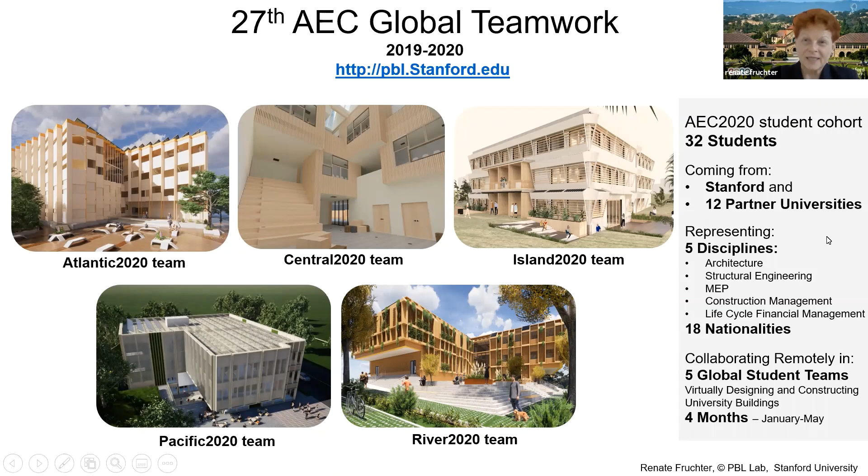But before we dive into very exciting student presentations, I want to extend a big thank you to our industry and faculty mentors, alumni, and owners and sponsors who so generously dedicated their time, attention, and knowledge to our AEC Global students.

In collaboration with industry partners, we defined 3 challenges to further foster the students' creativity, focused on sustainability, specifically this year, resilience, integrated project delivery, focused on the question whether to industrialize or not to industrialize, as well as shared risk and reward, and technology innovation, focused on intelligent interoperability between models and disciplines.

Winners will be announced at the end of the cyber event, May 8th. So don't forget to visit the PBL Lab Project Gallery website to find out who this year's winners are.

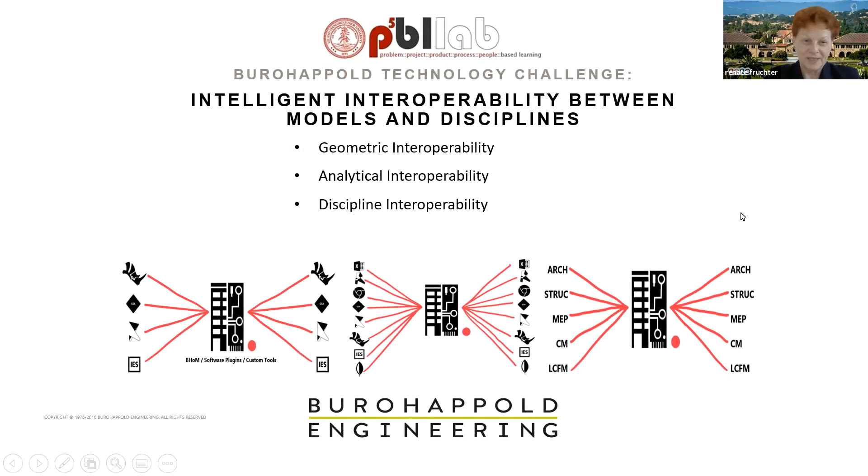Last but not least, a special thanks for the generous support of our technology industry partners that enable us to continue to develop new ways of working and learning by leveraging the latest emerging technologies like VR, virtual reality, AI, artificial intelligence, parametric modeling and optimization, and embed them in the students' new daily work practices that they experience in this global teamwork class.

And with that, let's move on to the student presentation.

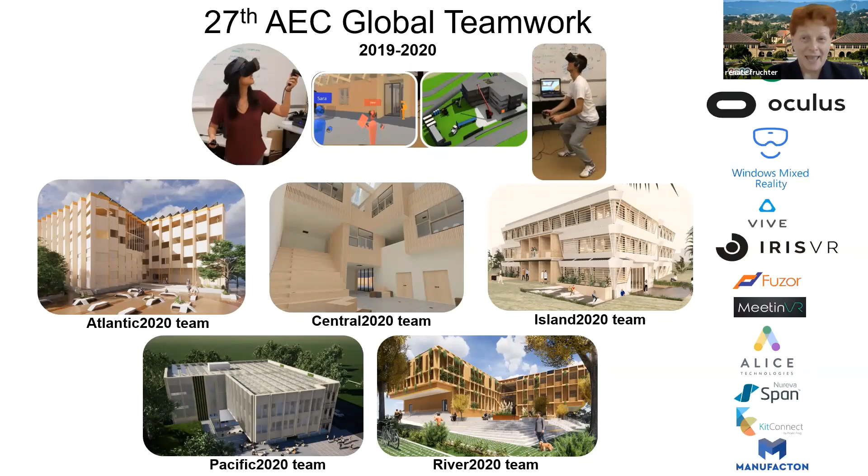The team consists of Maria, myself, MEP engineer from Copenhagen, Brandon, our structural engineer from Stanford, Ibrahim, the construction manager from Madison, Xuan, our second construction manager from Beijing, Isabella, our architect, and Lewis, the other structural engineer, both from Brisbane.

Our goals stem from who we are as a team, what we want to achieve in the project, and what we believe that we can achieve for the community through architecture, engineering, and construction. These can be categorized into three overarching categories: sustainability, collaboration, and technology, and relate directly to the outcomes that we can achieve in the project.

We believe in resilience, fostered through community inclusion, compliance with LEED standards, adaptability, and smart design. And we aim for a design and construction outcome that is prefabricated and disassemblable.

Our project is located at the fringe of the campus of the University of Wisconsin in Madison, located in the Midwest of the United States. While presenting opportunities for its views, our site is constrained by its lakefront location, single-site entry, and limited access.

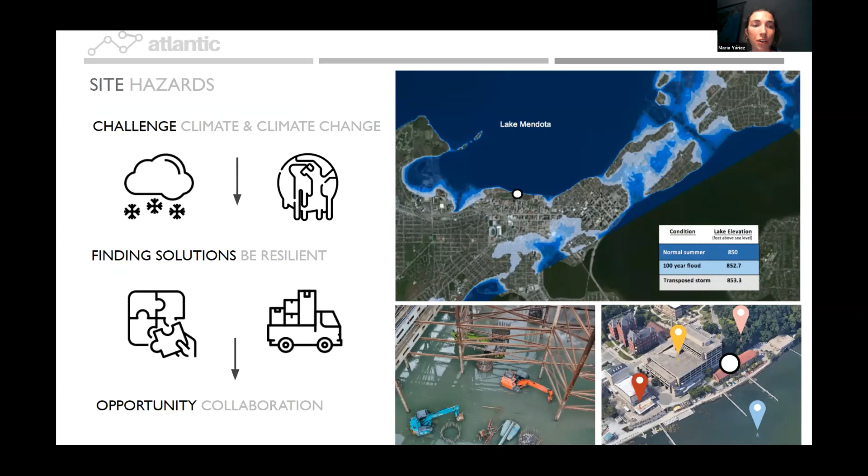Our team's process and conceptual driver is weaving, which implies the process of combining and integrating. We drew on the local historical practice of weaving, which extends from the basket weaving practice of traditional owners to textile production as part of the arts and crafts movement. Weaving unifies the threads of sustainability, technology, prefabrication, and discipline knowledge in a building for the future.

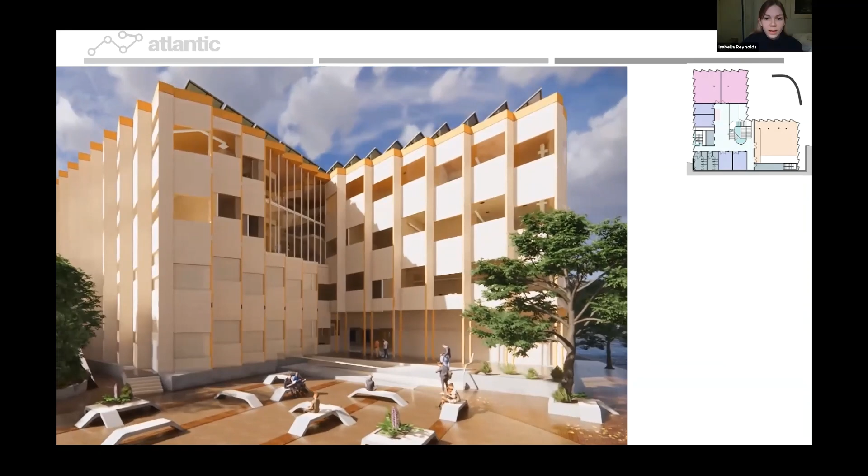The building product synthesizes the challenges of the previous iterations into an offering that interacts with its spectacular geography and evokes weaving through pattern, texture, and the interplay of light and shadow. It creates a place for learning, teaching, and making for a new generation of engineering professionals.

At the ground and mezzanine levels, learning spaces are centered around the connective stair, which connects levels physically and visually. At the first floor, faculty offices are gathered around a central open workspace, which allows staff and their students to meet and collaborate informally. The planning fosters connections between the building users through functional, delightful spaces, and the weaving concept

extends into the planning, with work pods weaving learning spaces into the public areas. Within the building, pattern created through opacity and transparency at the facade creates a dynamic, warm learning space throughout.

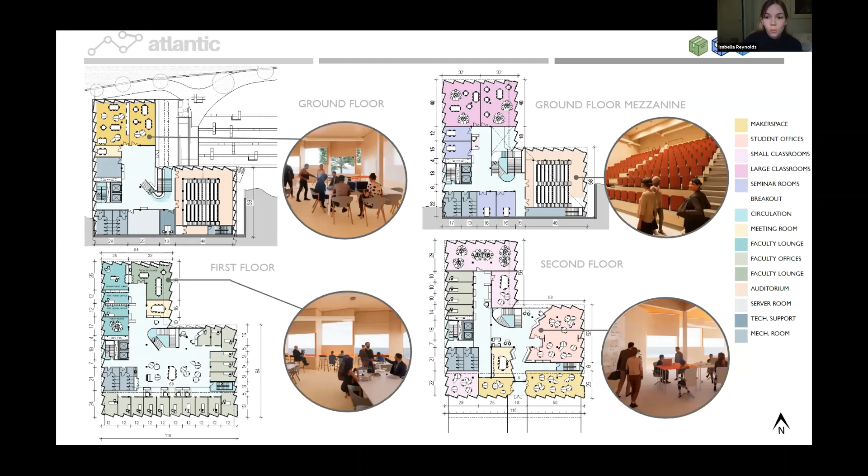All disciplines have worked together to integrate a design. A primary challenge was to create a design responsive to daylight and energy efficiency. Through collaboration with Isabella, our architect, the areas have been grouped together with similar positioning and thermal conditions.

The ventilation is decoupled from the heating and cooling systems, and this allows downsizing the equipment, reducing costs, and energy and space needs. The indoor air quality is achieved through fresh air, while thermal comfort is provided by hydronic floors and radiators placed in specific spots according to the thermal demand.

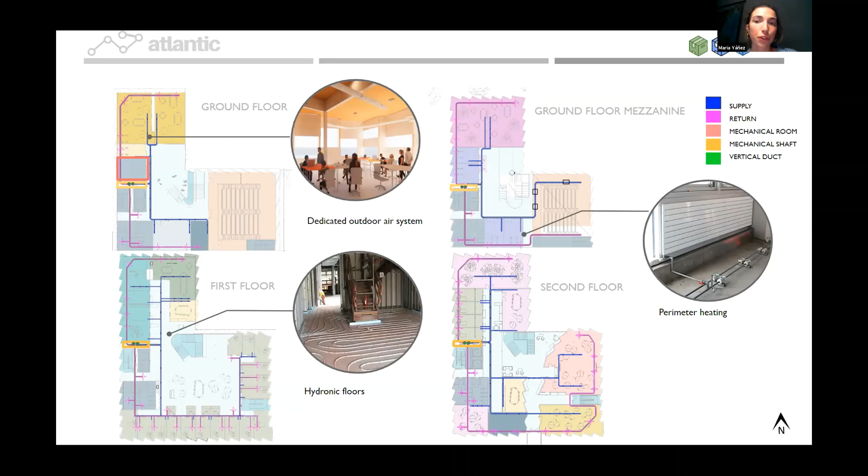Our grid system is actually concentric to the facade, providing uniform support to the CLT floor slabs along the building's perimeter. The beams in our grid were designed to not frame into the facade due to structural and constructability difficulties. Furthermore, disassembly of the facade would compromise the integrity of the building if beams were framing into it.

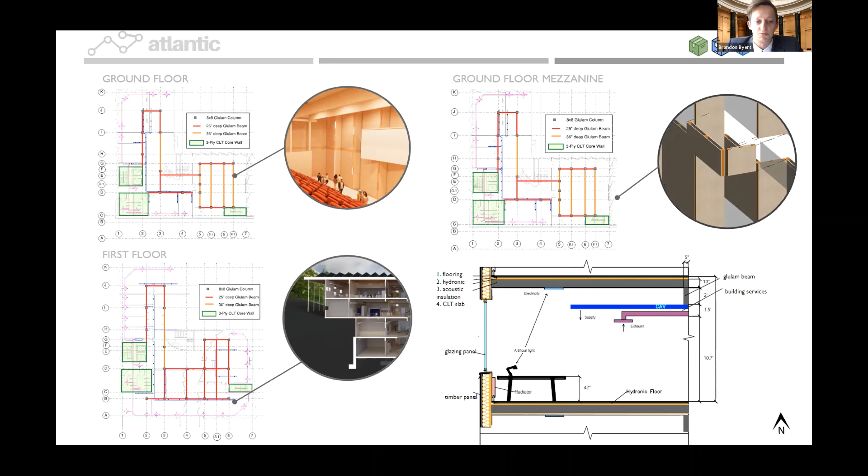The auditorium provides a flexible learning and presentation space with retractable seating and mechanized track shading that allows the space to be used in a multitude of ways.

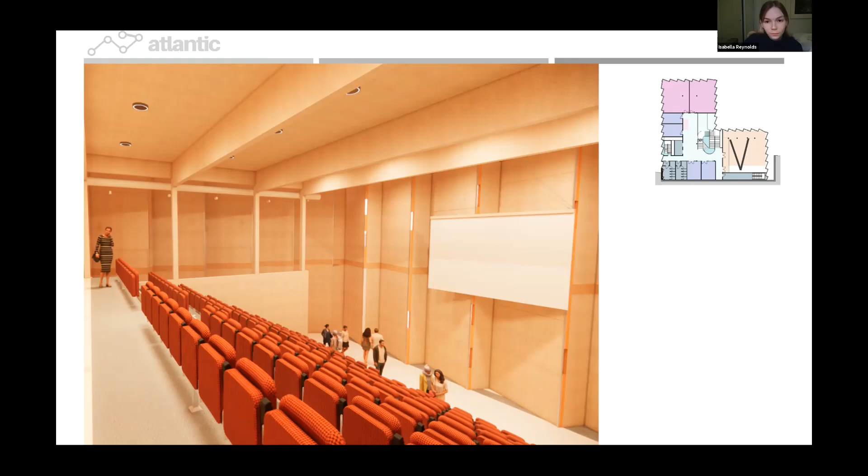The second building entrance at the south carves an activated concourse through the building interior and provides views through to the lake at the north upon entering the building from the campus side.

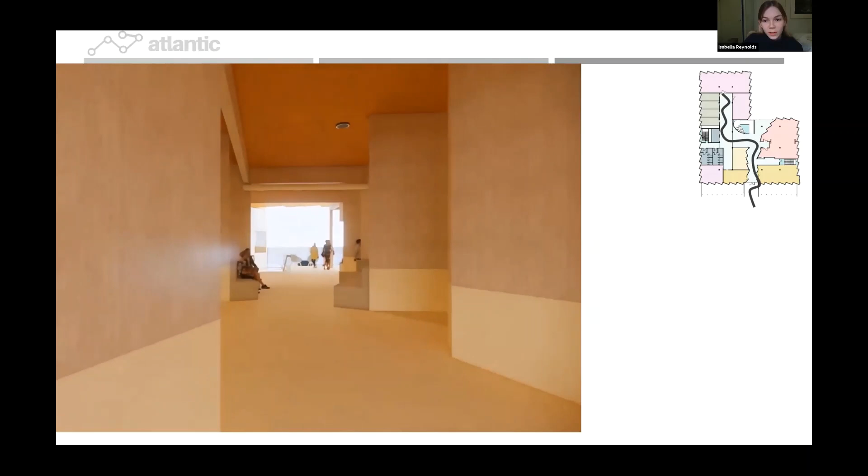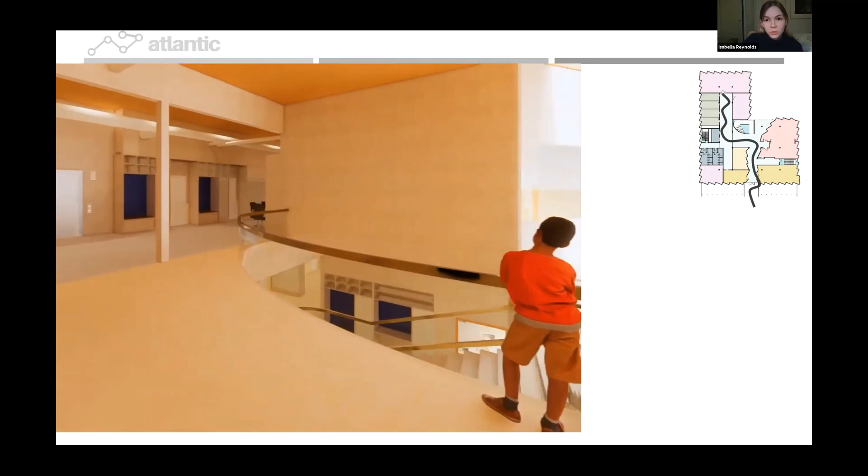The folded exterior expression is continued inside to create an inviting and dramatic procession into the building. The use of timber within the interior design fosters a connection between the material experience of the building and its construction elements, framed against glimpses of Lake Mendota.

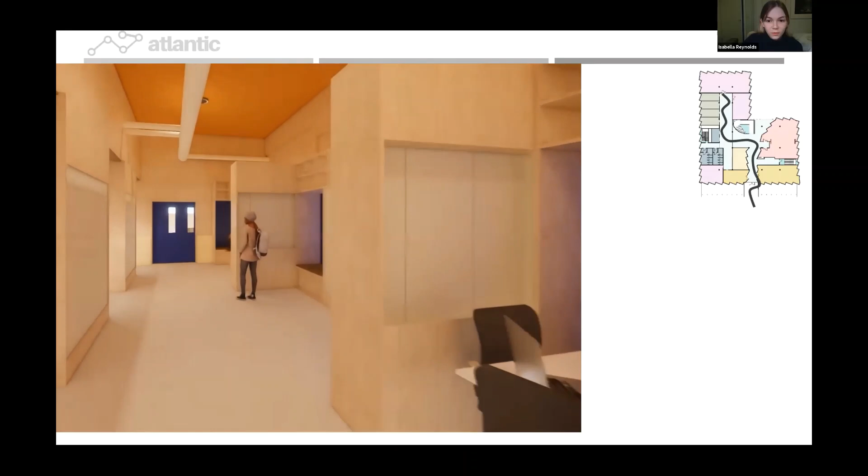The interior experience offers a synthesis of the geometry of the building form, discipline-specific requirements for each space, and the learnings from all previous iterations into a building for teaching and collaboration.

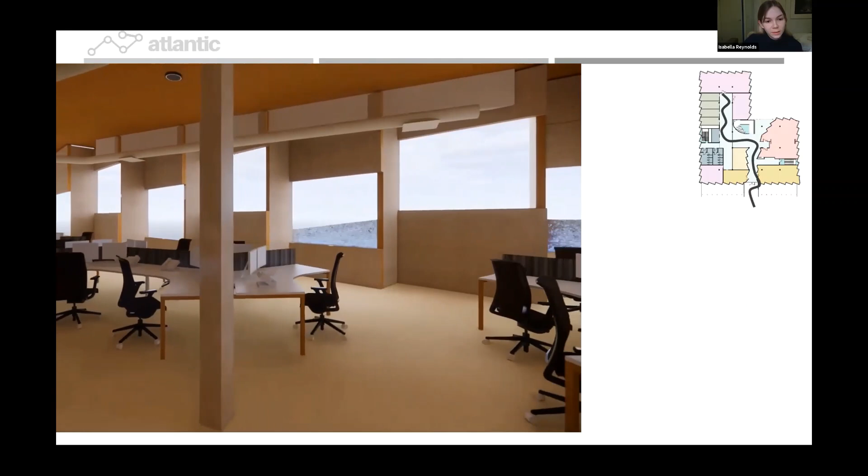Technology has allowed us to deliver an integrated building solution for our owners. By leveraging it appropriately, it has allowed us to create a highly interoperable, streamlined, and value-driven workflow. Our intelligent workflow contains the optimal combination of processes which maximize the value.

These criteria were used to assess where, how, and which processes should comprise our integrated, intelligent, interoperable workflow. The selected combination of processes allowed us to synthesize geometric complexity, ease discipline dependencies while iterating quickly, selectively optimize our design, and create value for our owners.

This end-to-end integrated workflow, facilitated through universal translation of information via SPECKLE and a single source of truth, has enabled the live linking of our design processes across the globe. Our technological solution not only unifies discipline drivers, but implements practicalities of industrialized construction and design for disassembly.

Within the design and modeling stage of the workflow, the facade was parameterized to ensure technical resolution of our design for disassembly. Then, with the manufacturing and construction stage, the system assesses the risk and reward for the prefabrication solution.

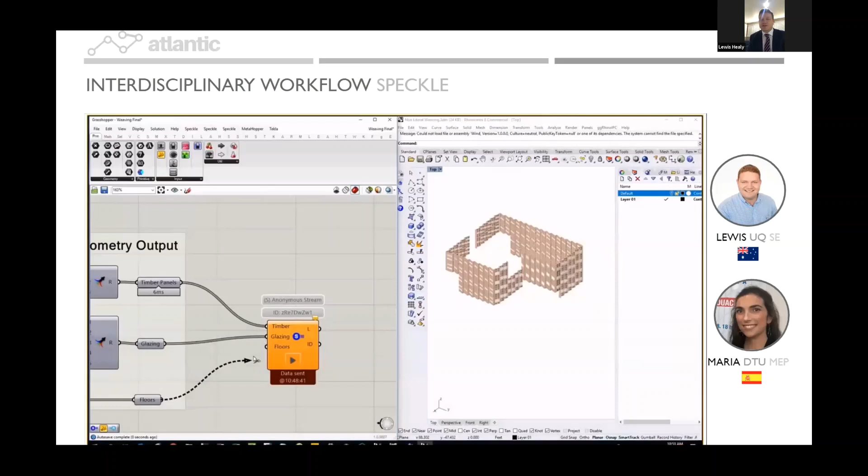Grasshopper and SPECKLE were selected as the driving platforms of analytical, design, and discipline interoperability. As a team, we use SPECKLE to connect the processes of each discipline across the globe. This video demonstrates the efficiency of one process within our workflow.

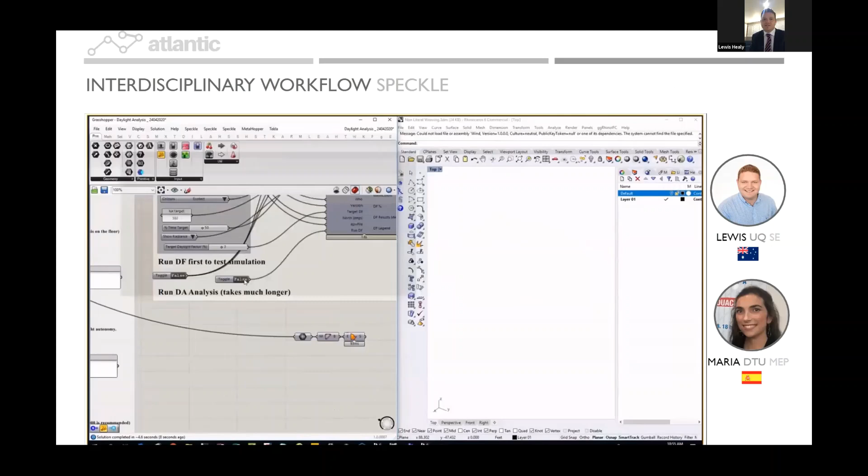The facade geometry was pushed by myself to SPECKLE and retrieved by Maria in the daylight analysis script. The analysis was run and the results pushed back to SPECKLE and retrieved by myself in our central Grasshopper script for data aggregation. This data would then be pushed to our interactive web browser.

The Grasshopper script forms a central location for all disciplines, with cross-disciplinary information able to be pushed and pulled as required. The system is set up such that it allowed users of all experience levels, including Maria with no prior Grasshopper experience, to receive its full functionality.

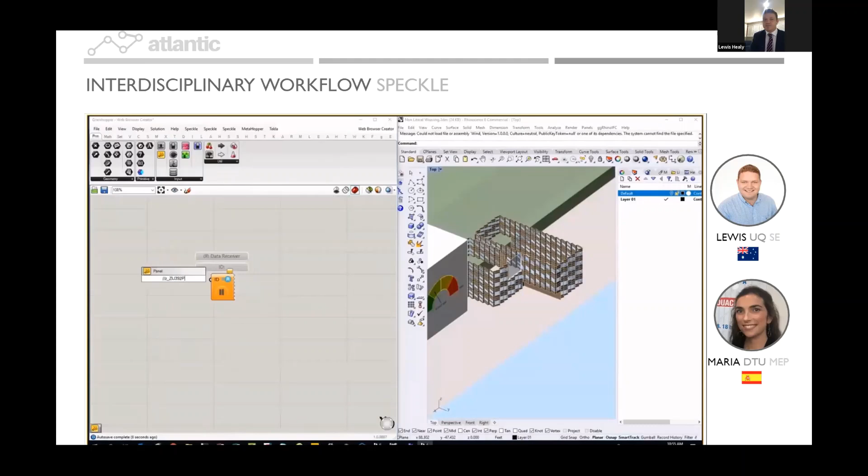Immediate translation of data between disciplines and the automation of processes such as the daylight analysis allowed for efficient and fast iterations, and ultimately the elimination of aborted or repeated work.

It's through the integration of technology that we were able to test, learn, and iterate for the key challenge of the project, the facade design. Design for assembly, disassembly, and reassembly required an intensive process of iteration to ensure its feasibility across all project and discipline criteria, such as perimeter structure, daylight, and expression.

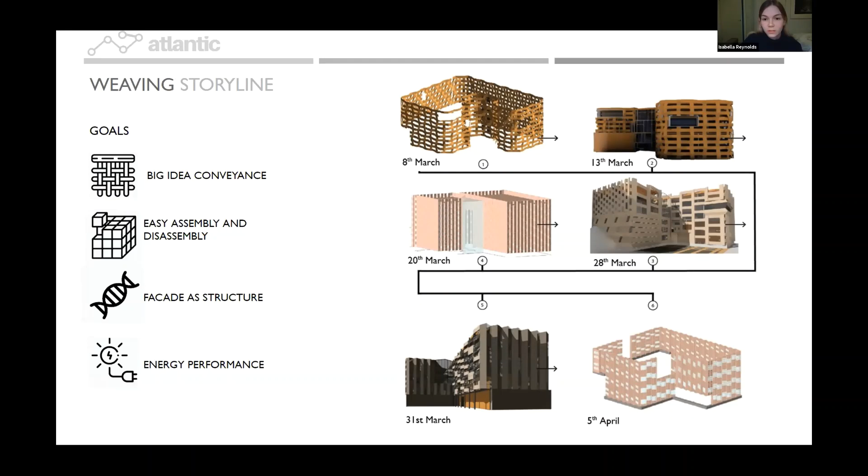In synthesizing these goals and discipline drivers, we created a prefabricated engineered timber facade executed with 3 different module types. This solution reduced on-site activity, construction time, carbon footprint, and allows for easy assembly and disassembly.

Our facade is both architectural and structural. The CLT floor panels will sit within the facade, and the narrower vertical modules are stiffer load-carrying elements, while the wider modules framing above and below the glazing are the non-structural timber modules.

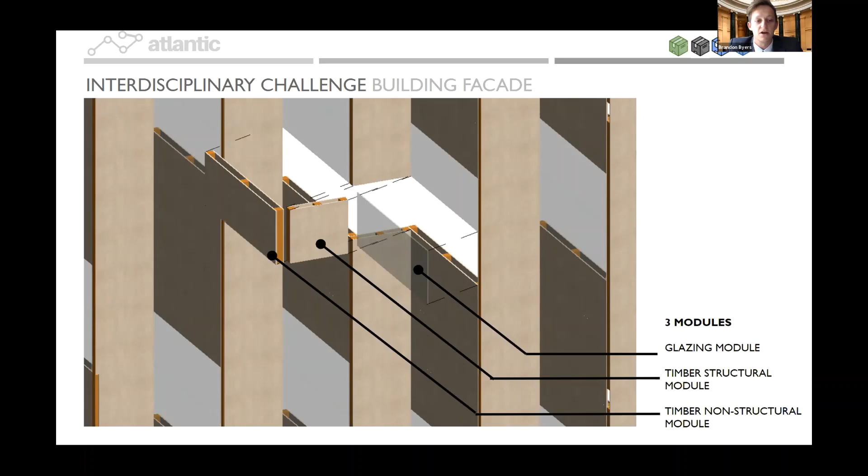To ensure that our facade was structural and architectural and designed for disassembly, we had to develop our solution to a high level of technical resolution. This is made possible through our end-to-end integrated workflow.

Our connection details were designed to allow for ease of initial construction and designed for disassembly. These timber connections are hidden from the public eye, but are essential for construction speed and efficiency.

We also devised a system where the core timber panel is on the inside of the built-up module, and then moisture protection, insulation, and flashing is enclosed within the timber cladding. The insulation and flashing overlaps from one module to the next to ensure continuous protection from the elements within the timber cladding.

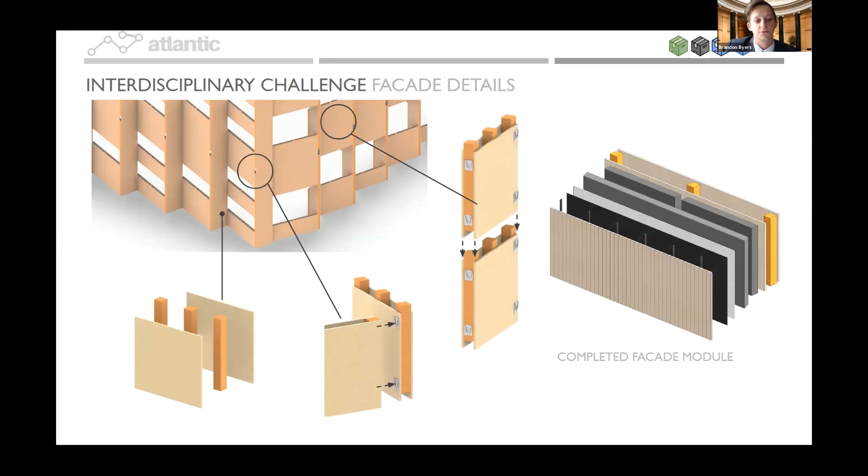We use parametric design to produce the module assemblies and minimize their variability, while balancing this against the registration of weaving through pattern and alternation.

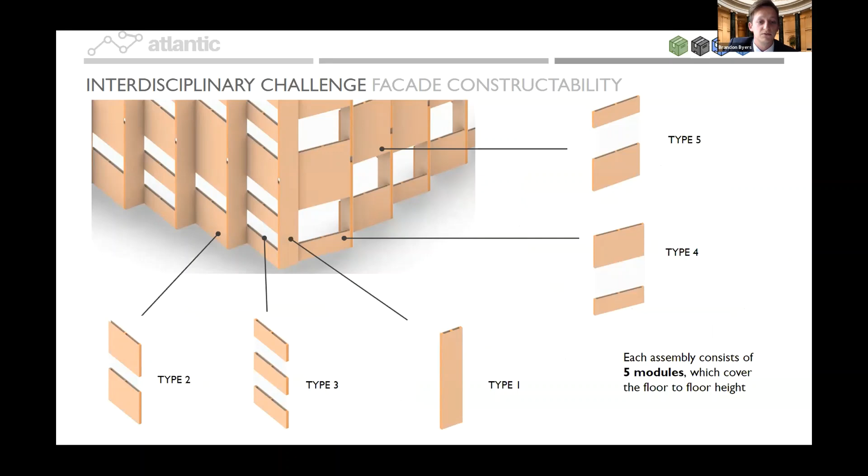We've conceptualized a kit of parts that emulates IKEA's assembly instructions. Facade panels, CLT floor panels, beams, and connections can all be reassembled to adapt to the changing requirements of its users and its context.

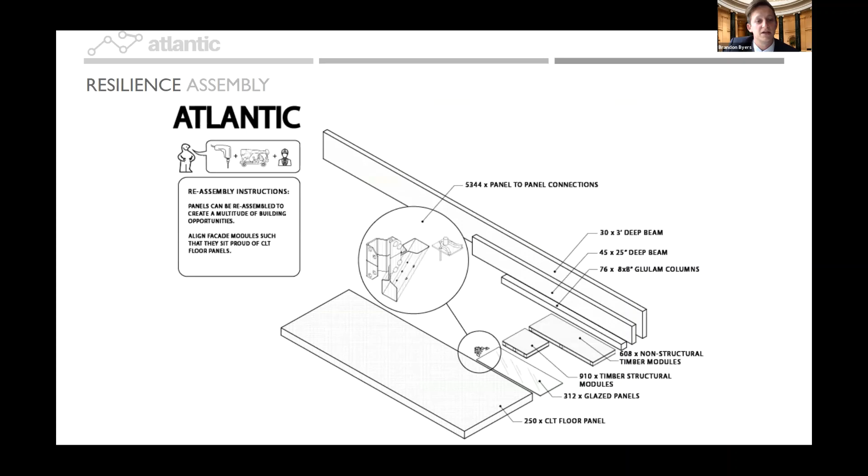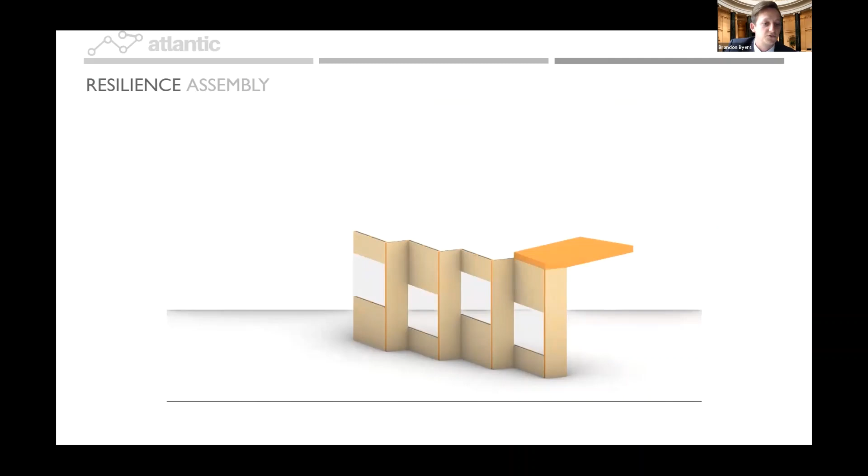The facade is constructed floor by floor with 5 different module assemblies. Each floor is 5 modules high with timber modules on the top and bottom for erection and glazing modules woven in between them. The tolerances are critical but can be achieved through industrialized construction.

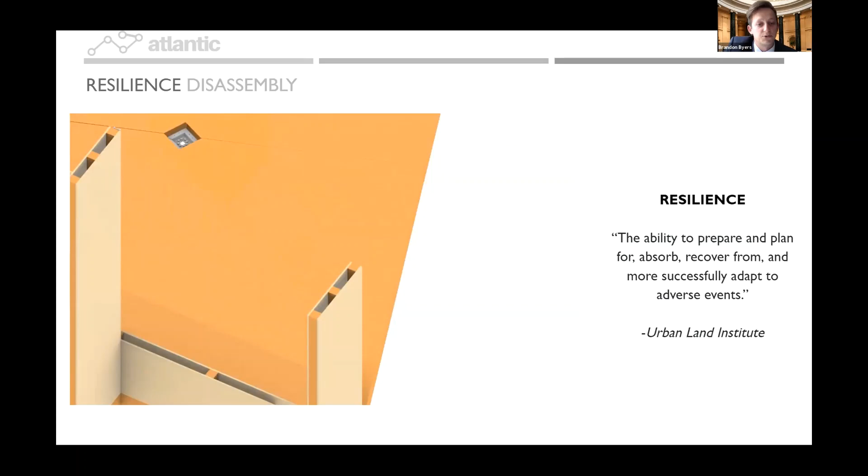The vision for Team Atlantic's design was to allow the building owners to prepare for and adapt to future adverse events. Implementing a disassemblable building has required a high level of non-destructive detailing in connection design.

Connections have been selected for flexibility in different configurations and reassembly, and to ensure that no damage occurs to panels for future reuse.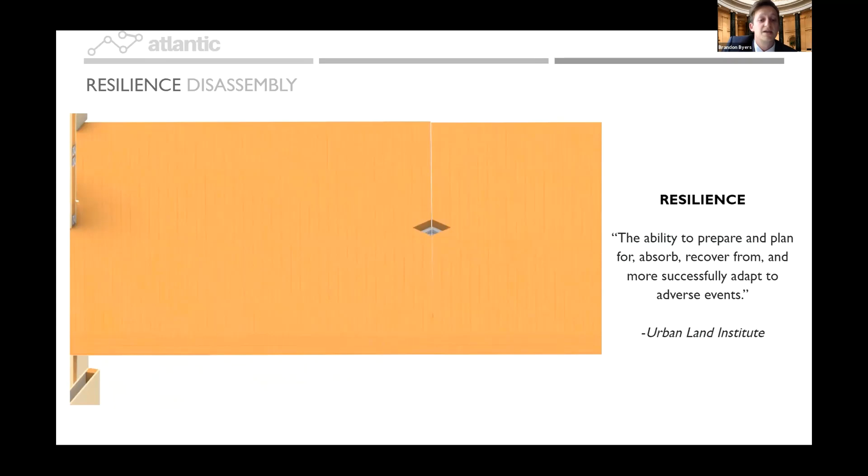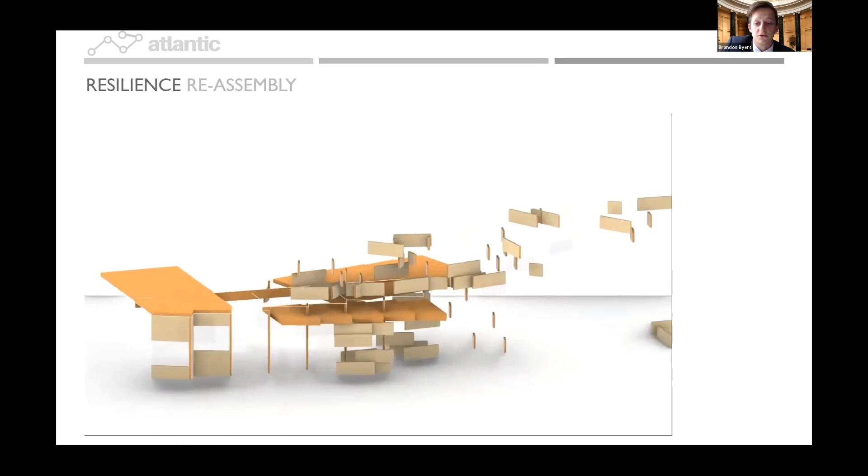Glazing and non-structural timber panels can be reassembled in any arrangement. The flexibility of the solution eliminates the need to predict future use. Rather, it is designed for uncertainty. Here we can see one of the many potentials for what the building could become at the end of life.

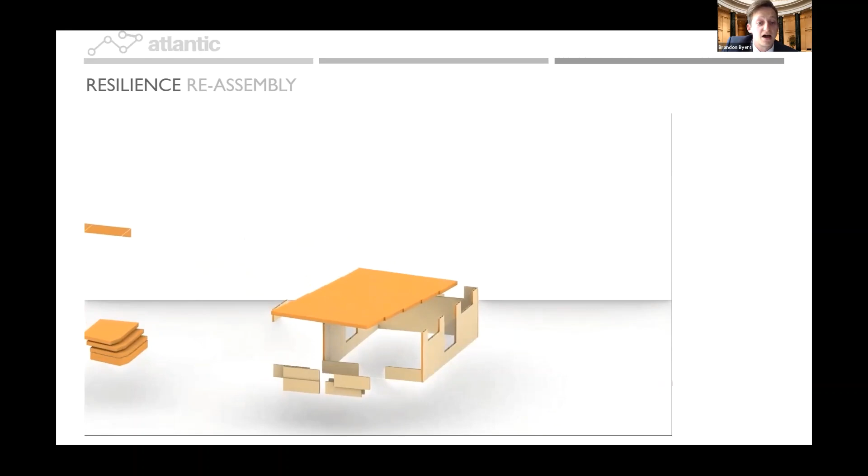While the panel sizes are designed for uniformity and breadth of building application, the Atlantic building would be perfectly suited to the creation of social housing, especially relevant considering the broad disparity between high and low income earners in the United States. This potential use contributes to the resilience not only of the single building, but of the community as a whole.

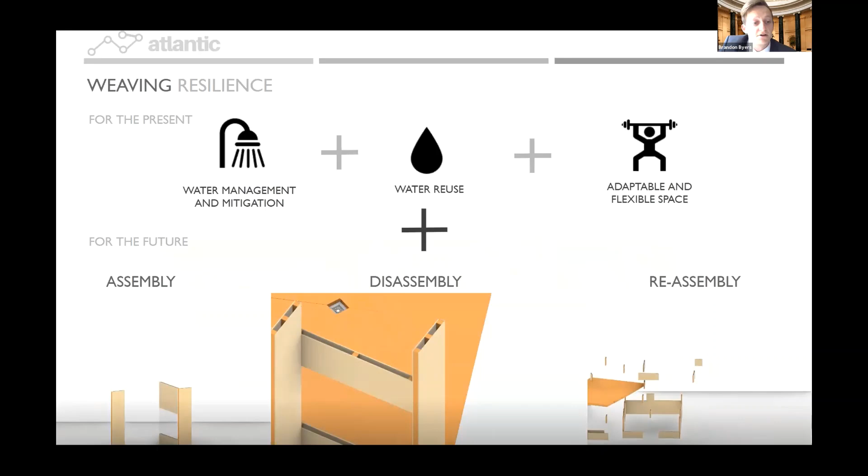Ultimately, our answer to resilience has been multifaceted. It includes water-sensitive design, reuse, and reduction, as well as adaptable spaces such as the auditorium, and a building solution intricately and expressly designed for assembly, disassembly, and reassembly.

The sustainable target value has affected the decision-making process of the team. A summary of key decisions affecting the carbon cost of the building is shown here. By choosing a mass timber building, we have further improved the sustainability of our project. The weaving harnesses the sun with 224 PV panels placed on the roof, which account for almost 50% of electricity demand, and finding energy efficient solutions has allowed us to reduce our carbon footprint and reduce consumption of resources.

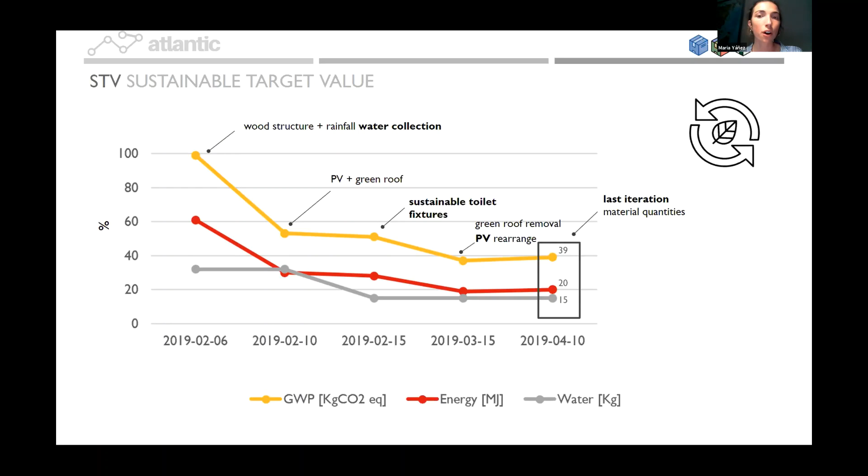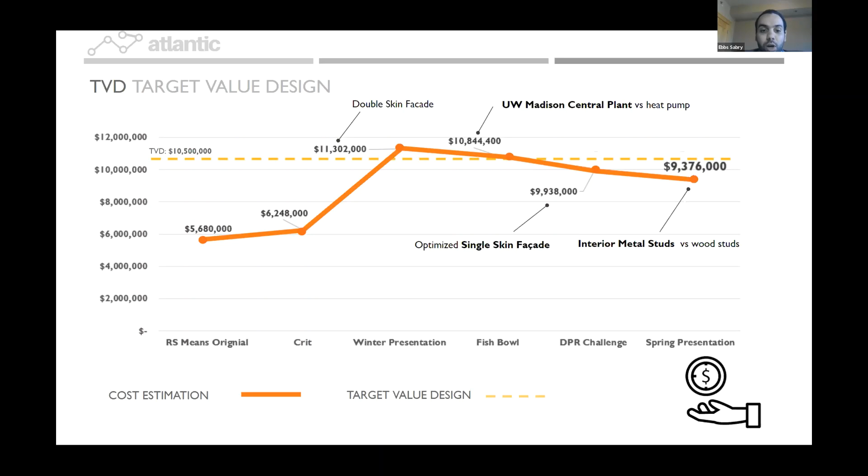Target value design was used to value-driven improvements involving all team disciplines. The cost tracking timeline here shows 3 major design changes, which reflect team collaboration and decision-making. Integration of costs within the iterative process resulted in a project exceeding owner-driven requirements and coming in 11% under total allocated budget. The following framework was developed to provide real-time integration, starting from design and engineering, then manufacturing, construction, and visualization. This enhanced the overall agility of the team to iterate, measure, and implement design changes and quantify their impacts.

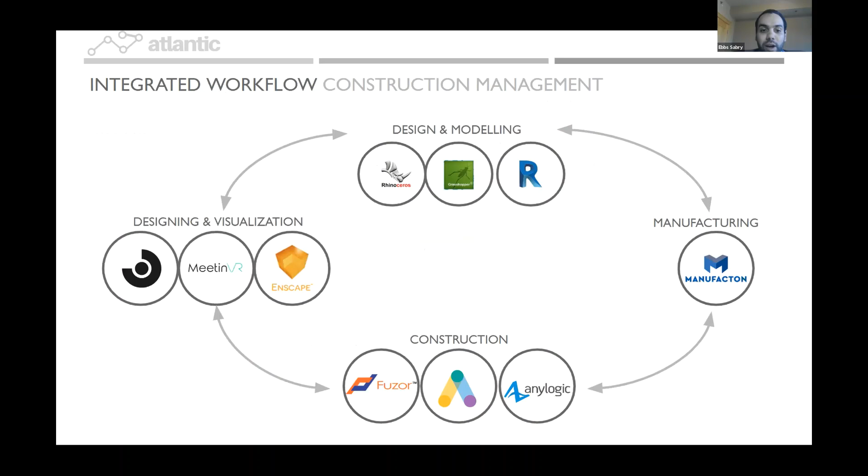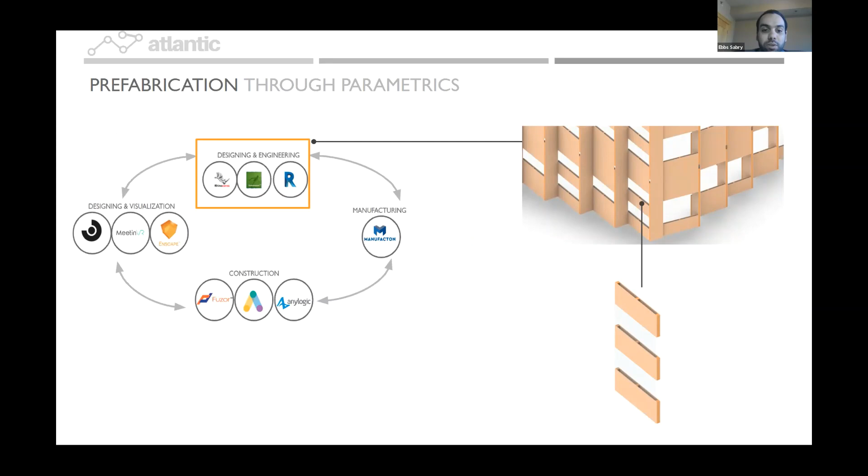Using Rhino, Revit, Grasshopper, the Atlantic team used parametric design effectively to investigate prefabrication opportunities of the facade at the module level. Fragmentation in the supply chain was one of the risks identified earlier. Thanks to Manufacton, Atlantic team was able to track status of prefab orders utilizing supply chain viewers. We quantified total productivity gains when shifting work offsite, enhancing productivity by 30%.

Manufacton allowed for real-time assessment of design impacts on industrialization through automated generation of bill of materials for prefab orders. This helped in quickly identifying sub-assemblies, quantities, and automating the cost estimation process. Finally, we managed to track productivity gains and mitigate risk for each step in the production line.

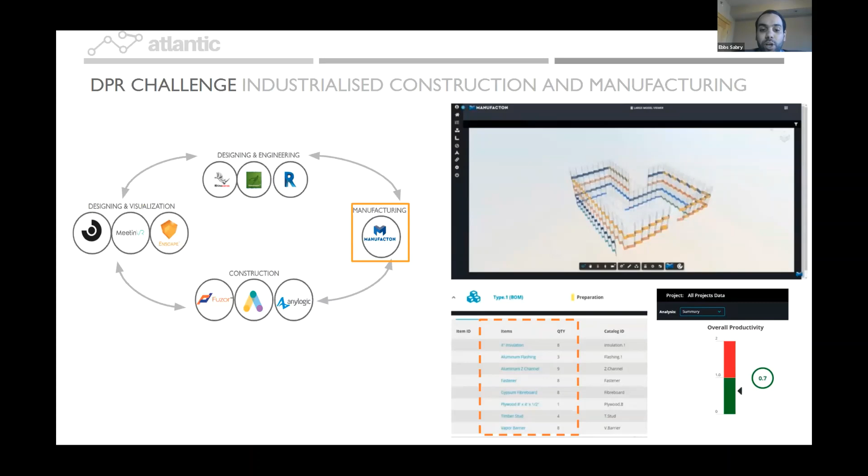AnyLogic was used to simulate and optimize processes through comparison of transportation and installation scenarios. The first scenario is fully prefabricating the panels, and the second is to prefix connections on site. Using AnyLogic simulation, 2 KPIs were investigated: first, the total time needed for shipping and installation of panels, and second, the pre-assembly area required. Risks associated with both scenarios, such as tolerance accuracies and coordination delays, were also modeled. The fully prefabricated alternative yielded better results in all areas.

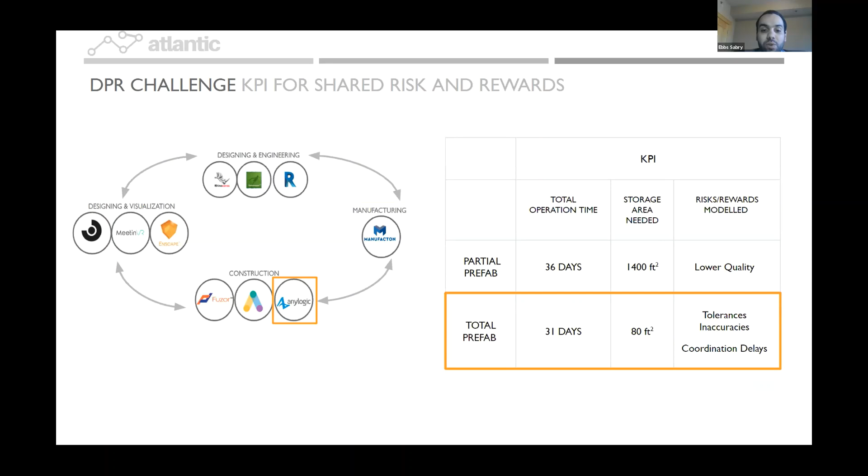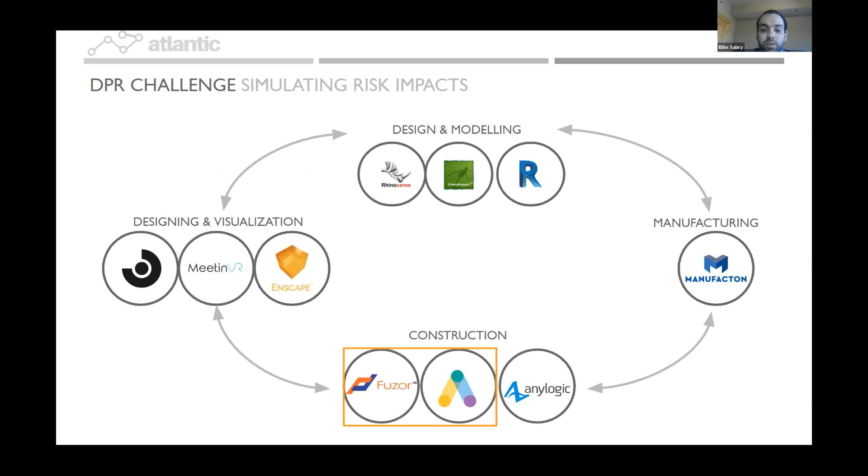With the introduction of smart scheduling and planning technologies, site logistics simulations were able to occur iteratively alongside the schedule. Consequent risks and rewards were quantified through metrics derived through the iterative process. Logistical challenges on site were able to be forecasted and resolved iteratively with Fuzor and Alice. Revised schedules and sequencing were output from Alice to resolve on-site issues, which were detected by Fuzor.

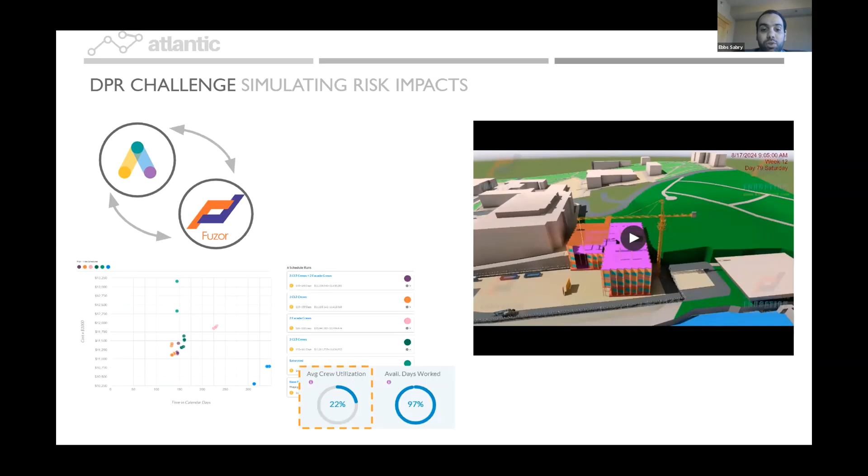These technologies allowed the detection and visualization of congestion during the peak workflow day activities, as seen in the video. Understanding the impacts of peak workflow activities allowed the team to foresee and mitigate construction risks. The last step was to investigate how constructability, safety, and logistical issues can be mitigated early in the design process.

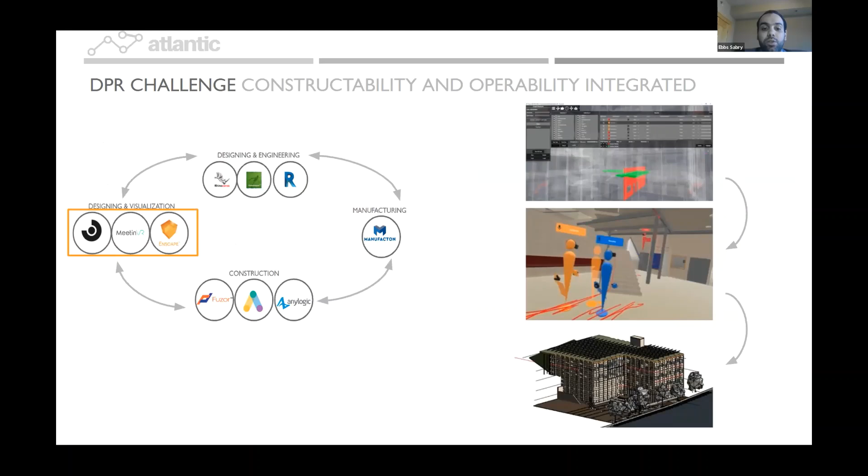After changes are discussed on the team level, they are augmented with the integrated model. Integration of clash detection using VR software within the design phase eliminated rework and increased interdisciplinary collaboration. Following integrated project delivery principles, Atlantic team developed an Excel tool to assess risk and rewards associated with the design decisions and industrialized construction solutions.

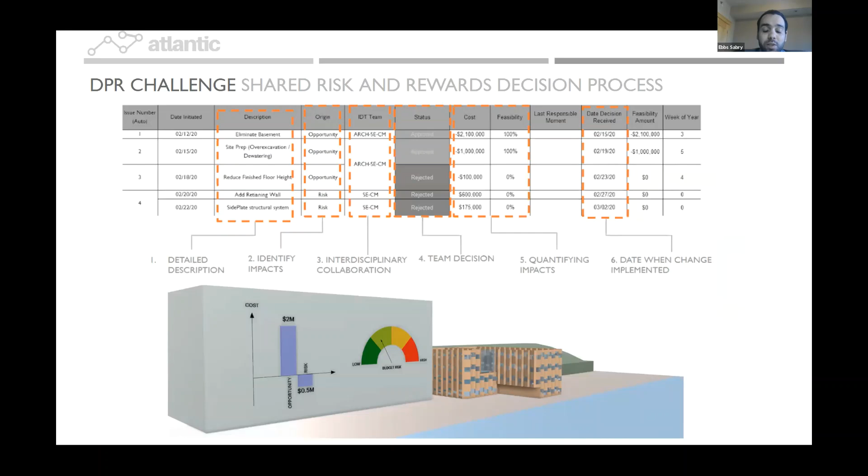The tool was utilized to assess alternative design decisions from a risk and reward perspective. This process supported clear and quantified feedback within the team, therefore promoting transparency and trust among team members, as well as interdisciplinary ownership and involvement.

Our end-to-end integrated workflow quantifies risks and rewards, allowing our team to make justified decisions on industrialized construction and design for disassembly. As well as this, it has allowed our interdisciplinary processes to be live linked and dissolve our team's discipline and location-based boundaries. Finally, key design information and decision-making metrics were able to be extracted and centralized, allowing the Atlantic team to make smarter decisions and iterations across the project.

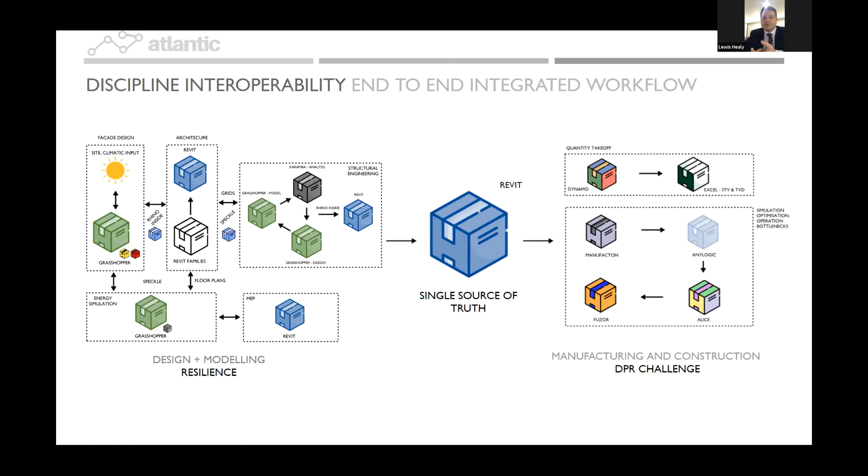The interactive public web browser allows anyone from team member to mentor to owner to participate in and experience our progress in solving our key challenge of the facade design. The centralized platform is the capstone product that connects the integrated design team to the end users, allowing the owners to engage with the building through design, construction, and future operation.

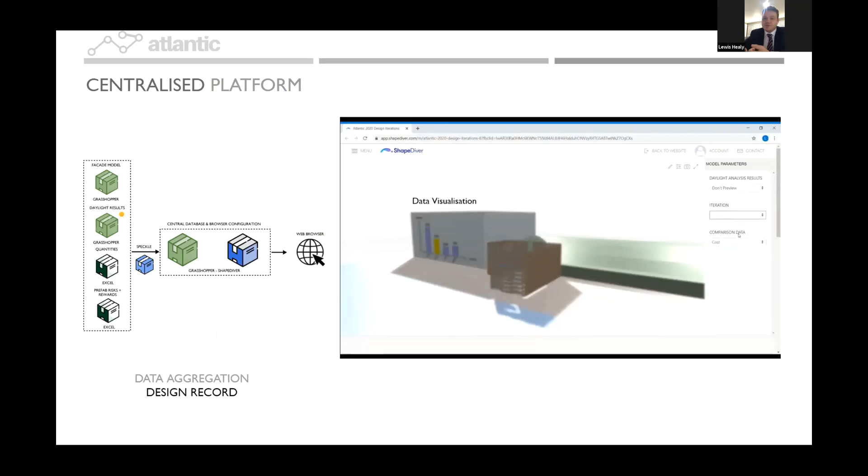This project has been a massive and challenging endeavor. So much international and industry collaboration has been essential to the accumulation of knowledge and experience on this project. We appreciate every phone call and every email we've exchanged with all of you volunteer mentors. Most importantly, we recognize and appreciate the unyielding time and effort Dr. Renate Fruchter has put into this coursework and team experience for us all.

We invite you all to join us and experience the application for yourself and get a better insight into how our facade became what it is today. Thank you.